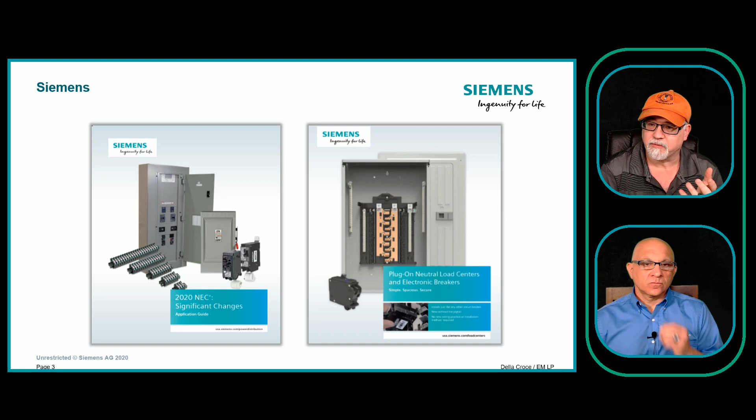Dealing with 680 is one of those articles in the code people don't pay a lot of attention to. They might not do pools, but every now and then. The problem is you get complacent and don't think about the hazards involved with doing things incorrectly in 680. We're so busy immersed in things like 250 grounding and bonding, so immersed in branch circuits, 210, 230 for services, that we kind of lose sight of the structure of the code.

Chapters 1 through 4 of the NEC apply broadly throughout the NEC. Chapters 5, 6, and 7 will modify or supplement chapters 1 through 4, so we have to think about those things. When we get up into 680, we tend to do things a little differently.

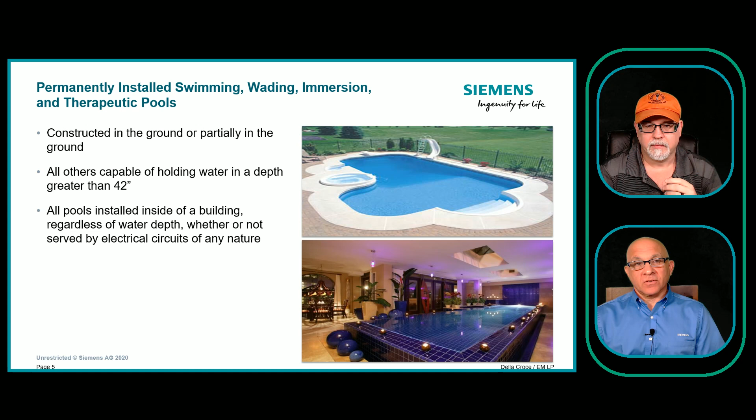So that's important to note. I've seen a tremendous amount of pools inside, other than inside, gyms, fitness centers, that type of occupancy. But the 42-inch measurement here is really critical, the greater-than-42-inch depth, because we're going to compare that to the storable pool definition next, to discern the difference between a permanent and a storable pool. And the 42 inches is going to come up again for storable pools. So that's an important number to keep in the back of your mind, if it can hold water to a depth greater than 42 inches.

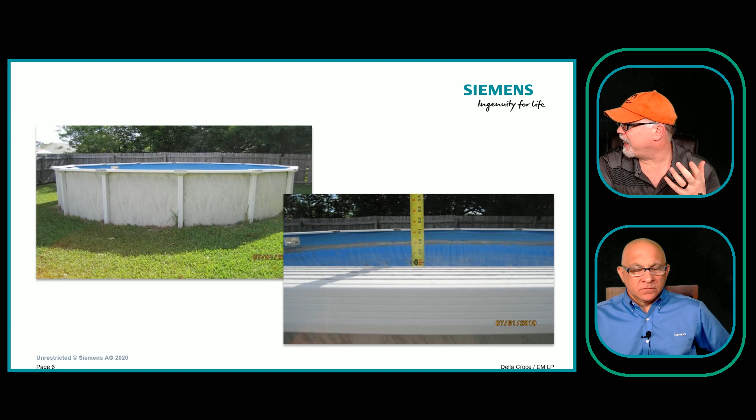But we can have the same pool made of the same material, holding water to a depth of less than 42 inches, and it's going to be a storable pool. It's just the water depth, not so much the construction or material of the pool, for the most part. So the target area for them to remember is that 42 inches is the line of demarcation on whether something's considered permanent, even if they're made exactly the same. It's the depth of water. Of course, and indoors doesn't matter - it's still considered permanent if the pool doesn't matter the depth.

And we say for the most part, because we're going to see a little blurb here when we're looking at storable pools now. So we shift our thought process a little bit to the storable swimming pool or immersion pool, spas or hot tubs - all of the storable type.

Right, so the definition tells us it's intended to be stored when not in use, meaning when it's not in use, this is going to be drained and put away. These can be constructed on or above the ground, capable of holding water to a maximum depth of 42 inches - like we spoke about, maximum 42. Or it could be the pool, spa, or hot tub constructed on or above the ground with non-metallic molded polymeric walls or inflatable fabric walls, regardless of the dimension.

So if they basically - soft spas, I've seen those soft spas, right - that would be an example of a storable. I'd also remind people out there that say, hey, my pool is storable, but I don't intend to store it, it stays up all the time. It's irrelevant what you intend to do with it. It's the concept that it is designed to be storable. Just because you want to leave it up all the time, it still would be storable, again, if it's capable of holding water to a maximum depth of 42 inches. So whether you remove it or not is irrelevant to this.

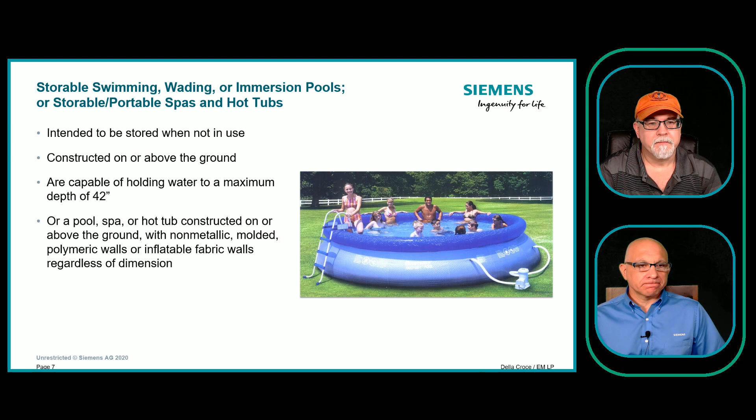All right, so this is kind of like that picture that we saw earlier - hammering home visually that this pool could be storable or permanently installed depending on the depth of the water. Bear that in mind because you might think you're getting something that's storable at 48 inches, and you install it, and an inspector comes out and considers it permanent, and you're thinking no way, this is storable - but the depth is going to say differently. There are significant requirements associated with a permanently installed pool versus that storable, which are not associated with the storable pool. So it's important to determine what it is.

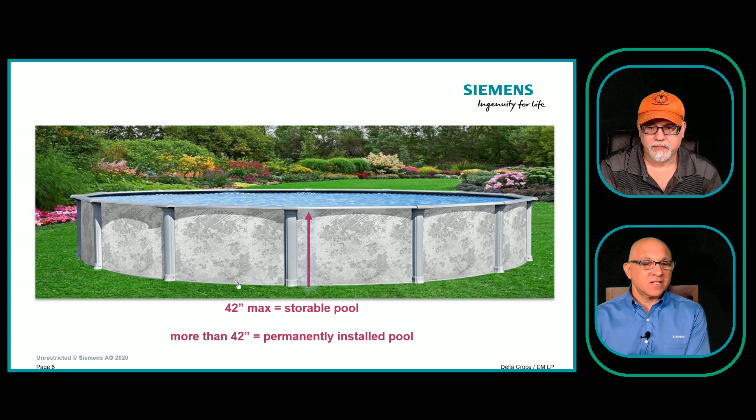So Vince, talk to us a little bit about this. Obviously we have pump motors for permanently installed pools as well as storable pools. The question comes up a lot, and I'll let you explain this, because I believe you also have previous history with listings, doing field evaluation type things. For people out there, pool pump motors that are permanent, can you use the permanent ones on a storable? Can you use a storable on a permanent? I guess that's kind of a lead into what we're talking about with this slide.

So it has a specific listing. Now, we can hope that all pumps say that, that it's listed, but I don't know 1081 - I don't know if that language, 'caution, this is for use only with permanently installed,' is required by the standard or if this manufacturer just added it. I assume the standard requires that marking, but that's a guess on my part. I'm pretty sure it probably would, because there are limitations with pool pump motors for direct wired applications versus what you'd get for these storable pools and things like that.

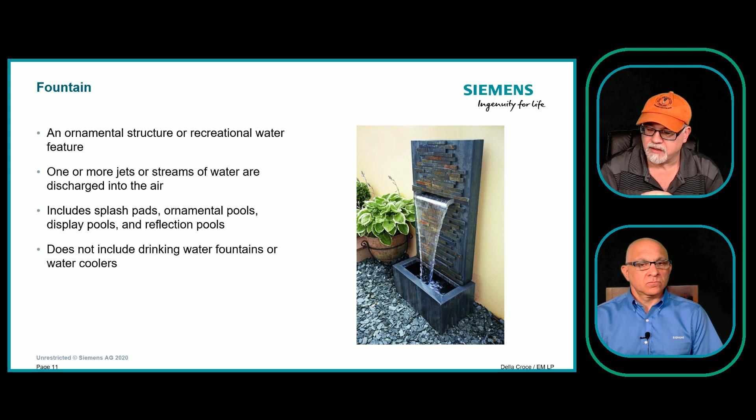So there should be some synergy between the work we do in this article versus what we do in 422. One of the things that changed was to clarify fountains, to differentiate them from drinking water fountains or water coolers, because drinking fountains are a totally different thing. That was clarified in the 2020 code.

Now, permanently installed decorative fountains and reflection pools - so again, we just covered fountains broadly, and now we have different, more specific fountains. Interesting enough, these decorative fountains and reflection pools can be so closely related to a swimming pool aspect that it could actually turn the fountain into having to meet the requirements of a permanently installed pool.

In the image we see here, this is obviously not anything to do with a permanent pool. It's separate - a decorative fountain application with its own definition. So you want to take that off, and we'll continue.

They're constructed in the ground, on the ground, or in a building in such a manner that the fountain cannot be readily disassembled for storage, whether or not it's served by electrical circuits. Certainly not portable - this is storable versus not.

The definition also tells us they're primarily constructed for their aesthetic value. They're not intended for swimming or wading, so nobody's really supposed to be jumping in these things to float around - but we know they do. That's also a factor in whether electricity is served to it or not, since there are still associated hazards involved.

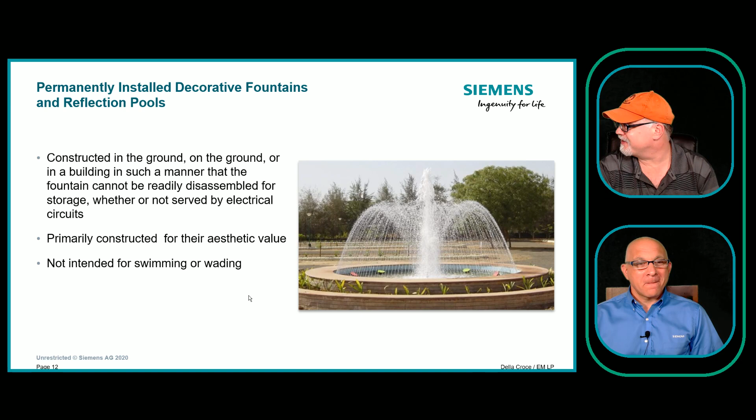Anything else you want to add on that? That's pretty cut and dry. I guess the only other thing to note is that this is a new definition for the 2020 code.

We didn't have this previously. So what did we call it? We probably called it a pool—a permanently installed pool. The depth, if it's in a building, we know it's permanent. If it's in a church, it's permanent. So what else were we going to do?

I think that might have caused problems for some people with how you have to meet some of the requirements for equipotential bonding and things like that. You didn't know. What did we do before? Did we treat it as a storable pool? Was it treated as a hydromassage tub or some type of physical therapy spa? The question is, I don't know. We'd probably get, if we asked 50 different AHJs and 50 different municipalities, 50 different answers.

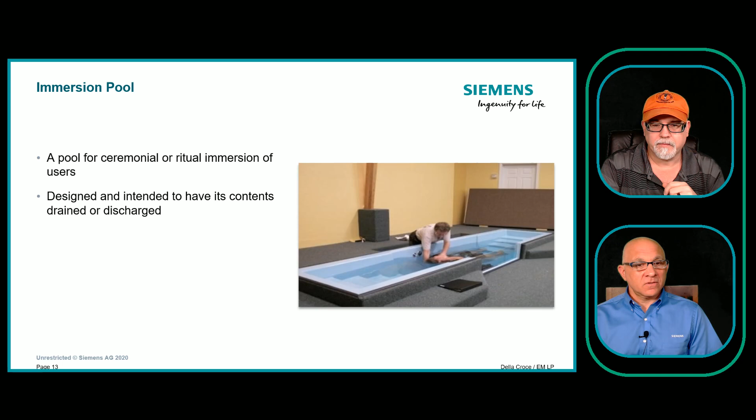I've loved being part of the code development process rather than sitting on the sidelines—being active and involved in it. It takes a serious level of commitment, but it's very rewarding to see the code get better each cycle. I think 2020 was a huge leap forward, and I'm excited 2023 will be as well, with a lot of people getting involved. There were a lot of changes in 2020 in 680 and outside of 680—another active code cycle of the year for change.

So you kick in chemicals, whether it's ozone treatments that you do. This hot tub that I used to have was ozone, and that was its process of sanitation. But you have the chemicals, so you're not going to drain the water.

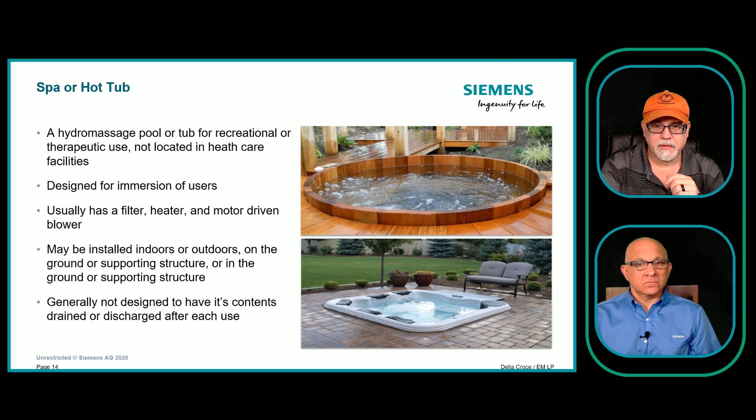And of course, ours had the ozone filtration system built into it and everything. In fact, ours also had a stereo system built in, so that when you're in the water, it actually played music from the water through the bubbles, and you could hear it while laying in it, because otherwise the speakers would be too loud. But it was designed so that with your head on the rest, you could hear the music better. That was kind of neat the way it would do that.

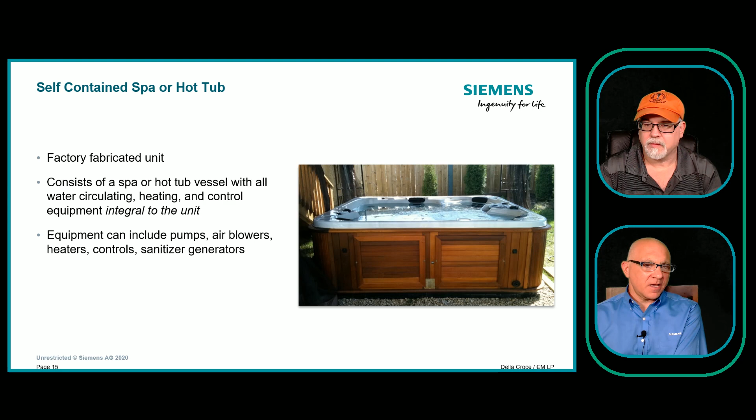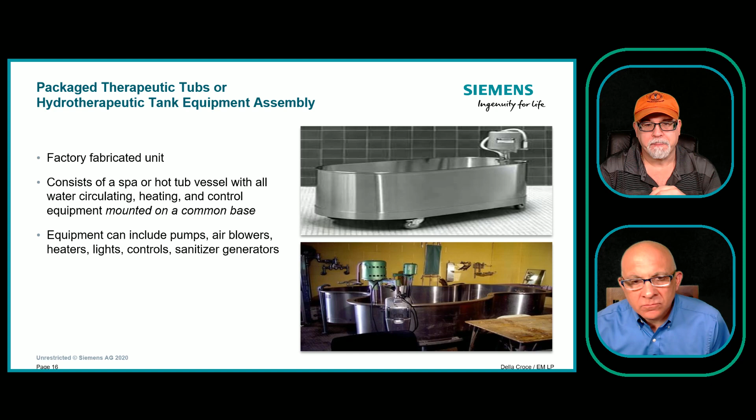Obviously, in this case, pull the drain, refill it. It is a bathtub, and I think I have to explain that to people all the time. It has all these features - it's a bathtub, it's still a bathtub. It's for bathing, you can enjoy it, you can relax in it. It's for therapy, hydromassage, but it's a bathtub, right?

Not to be confused with a hot tub or spa. Yeah, we would drift into a part of 680 that we wouldn't want to be in if we considered this a spa or hot tub. The Hydromassage Bathtub has its own part inside 680, and I get the luxury of staying in there - I don't have to do some of the things I would do if I treated it as something else. And of course, we're going to cover all that in this series, so you're going to learn all of that.

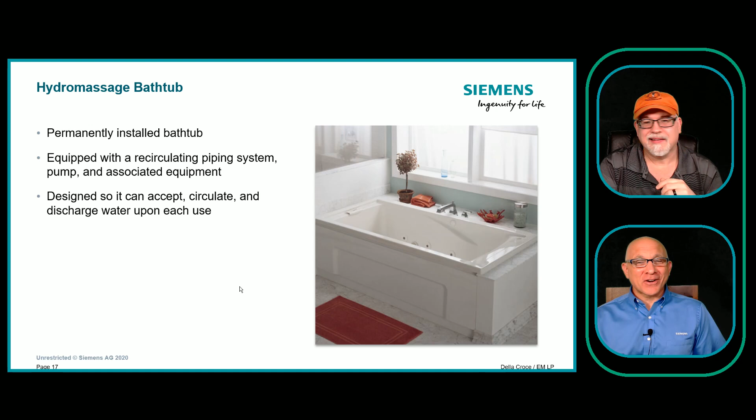They have been around for quite a few years. So I guess that means we're old. That's true, but certainly for the last 15, 20 years we've seen these around here, there, and everywhere. Amusement parks like King's Dominion, Busch Gardens, Disney, they had the water parks, probably had these things well before anybody took them into consideration of what they were. It's water, and sometimes they have lighting components or things near it, and receptacles, so I guess it's things we have to think about.

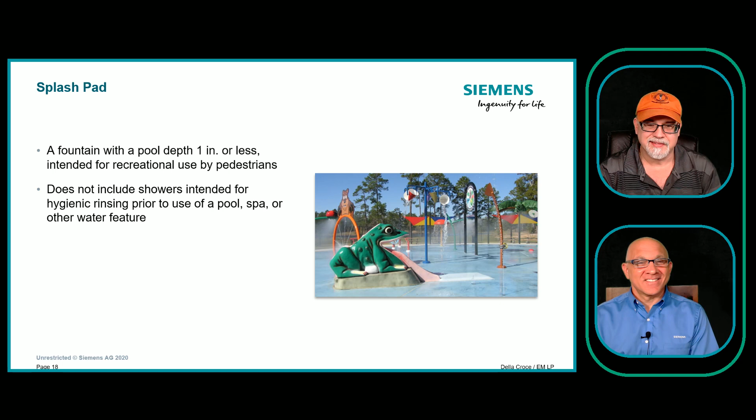We spent a lot of work in the last 2 cycles trying to define what a corrosive environment is, and I'm going to do my best to keep my opinion out of it because we worked very hard at trying to clarify. The problem I originally had is that we don't really define what a corrosive environment is. We give some guidance and we have some assumptions of what's considered a corrosive environment based on data or incidents that people can report, corroded material, metal.

All right, so I'll lead into the definition. This language for the 2020 was in 680.14. Yes, and it's been relocated as a definition now. Yeah, we'll leave the wiring methods separate. Right, so we'll get to those. So for those who are just seeing this definition for the first time, maybe we can say, quote unquote, it's a new definition, but really this language was in 680.14 in the 17 NEC. Now it was plucked out of there and actually brought up as a definition.

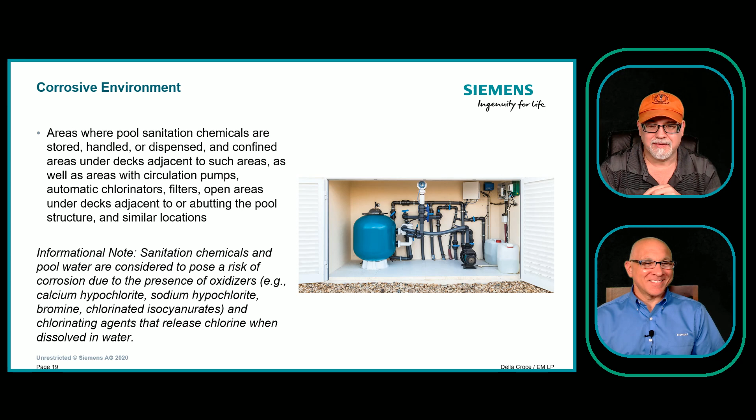Again, before I change off this slide, I just want to remind everybody that all of that stuff in that room is plastic. Just think about that. All right, we'll go on to the next one.

I didn't soapbox too bad. No, that wasn't too bad. All right, not too bad. Okay, next, Vince, take this up.

Again, we're all familiar with lighting around our pools and things like that. We have this concept - before you do this, I have people ask me all the time, is 1,000 volts low voltage? And the answer is yes. Is 120 volts low voltage? Yes. Is 70 volts low voltage? Yes. So over 2,000 is medium voltage, over 35,000 is high voltage. Anything from 0 to 2,000 is considered low voltage. So in order to clarify certain applications around pools to a voltage level, we had to have a definition. This is not new - it was just talked about in other areas in 680 that got moved over into a definition.

What are we talking about? Low voltage contact limit. It's so important that they didn't just say low voltage - it's low voltage contact limit values. We've got different types of landscaping luminaires or pool-related luminaires that are going to have a low voltage contact limit. So what do we have here as options? Right, so yeah, this is not a new definition for the 2020 code. I think this came maybe 3 or 4 cycles ago - it was actually in the code when dealing with luminaires and applications, and now it got moved a couple cycles ago over to here. Obviously it's broadly used.

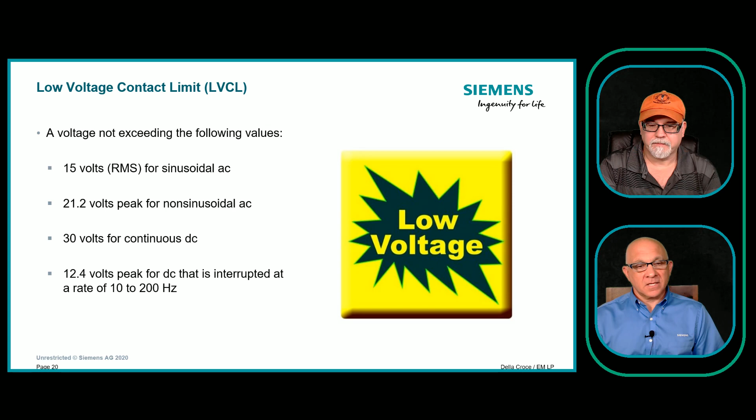Okay, we had a little discussion. We were talking about all the different pools and things, but then again, a lot of the references talk about maximum water levels. What is the maximum water level?

The thing that comes to mind, Vince, is if I have a pool with a skimmer and the water can never get above the skimmer because it constantly will pull the water out and circulate it, where's the maximum water level? Is that the maximum water level? Or if I have an application where I don't have those and the water could get to the top and flow out, well, what if the skimmer's not working? What if that stops, which is doable?

It can be clogged up. If you ever had a pool and you don't do proper pool maintenance, it can fill up, and then again, it's useless and it's going to continue to fill. So we had to have a definition. So kind of talk us through this definition.

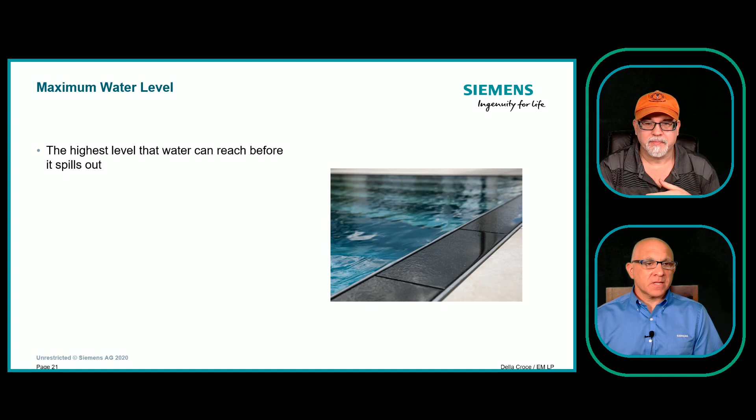All right, so that was our definitions, and I encourage you—again, I think we didn't cover them all. Understanding wet niche luminaires and definitions of a wet niche luminaire, understanding what a dry niche is, all those type of things—I encourage you to read it. Don't skip out on looking at definitions. They're really important. As we move through this series, you might see times we'll go back to the code book and look at something if there's a definition that we didn't discuss, so we can make the user aware of it, or whoever's watching the video.

So we're out of .2. We're going to move into section 3, which is approval of equipment. So Vince, you want to take us through this, since you have a little bit of a background in some of this kind of stuff.

So yeah, I think we probably should have mentioned earlier, we're in part 1. Part 1 applies generally. There's a lot of requirements that we're looking at in part 1 here that are going to apply to whether we're dealing with a spa or a hot tub or a fountain or a storable pool or a permanently installed pool.

A lot of them make reference back, and the scope of each part will tell us if part 1 applies or not. For the most part, off the top of my head, most parts say comply with part 1 and something else. Part 1 is going to be the general one. But not all of them, because part 8 says stay in part 8 - pool lifts. Part 1 generally applies, but part 8 covers pool lifts specifically, so just be aware of that. We're in part 1 right now. I'm not going to lose scope - if I start to stray, drag me back into the circle.

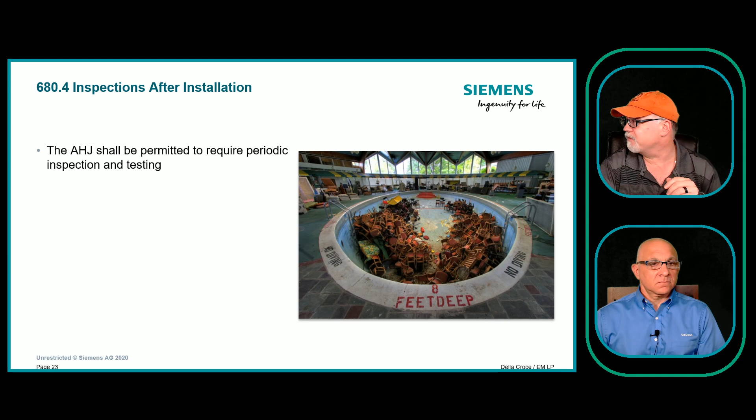680.5, ground fault circuit interrupters, not to be confused with GFI, not GFPE, but ground fault circuit interrupters. Tell me about this one, because I see the ones on the screen, I believe made by Siemens. Well, let's first note ground fault circuit interrupter is a defined term in Article 100. When you look at the definition, and the accompanying informational note, when the term ground fault circuit interrupter is used in the NEC, this is people protection.

This is 5 milliamp people protection. You mentioned GFPE, ground fault protection of equipment, also defined in Article 100. That's exactly what it says it is, protection of equipment, it doesn't care about people. It's set to operate at milliamp levels much higher than GFCI protection. So 4 milliamps or less, not to activate, 6 milliamps or greater, to activate. We choose 5 as a nominal, a benchmark that manufacturers achieve. So again, the definition talks about 4 or less not activating, and 6 or greater activating. This is people protection, to protect personnel.

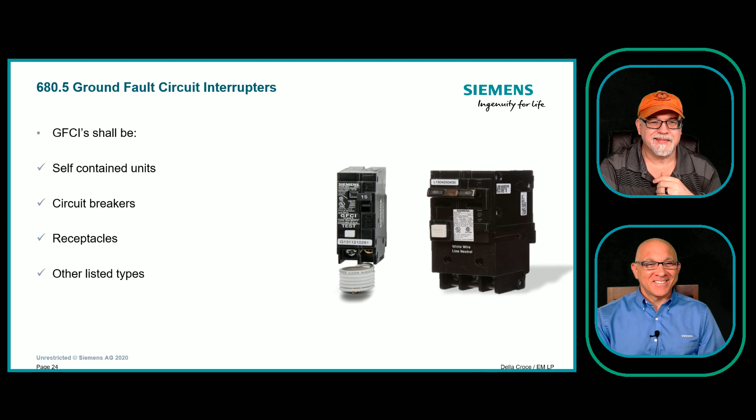Get me excited, talk about 250. All right, 680.7, bonding and equipment grounding terminals. Vince, take this one away. I know that Burndy is a great company that makes a lot of different terminals, terminating devices, and things like that. So what are we talking about here with 680.7?

Yeah, and this is fairly new, I think it really started about the wet and corrosive environments in the '17, I believe, and the worry about the termination, the validity and reliability of the termination in these type of environments, corrosive environment, which is another good example of why we did at least need a definition of corrosive environment, because obviously it's popping up in different locations. So these terminals that we're using for bonding and equipment grounding, they have to be identified for use in wet and corrosive environments. So the code specifically requires that now.

Field installed terminals in damp, wet, or corrosive environments have to be composed of copper, copper alloy, or stainless steel, and all of these have to be listed for direct burial. And they do make products.

My time as an AHJ, sometimes I'd hear, well, they don't make that, I can't get those. That's why I didn't do it, Mr. Inspector, because they don't make one. But the reality was, most of the time, they do make these products. It's just that the local supply house didn't have them on the shelf because nobody really asked for them. Understandable, if installers don't ask for a specific product, there's really no reason for the supply house to keep it on the shelves.

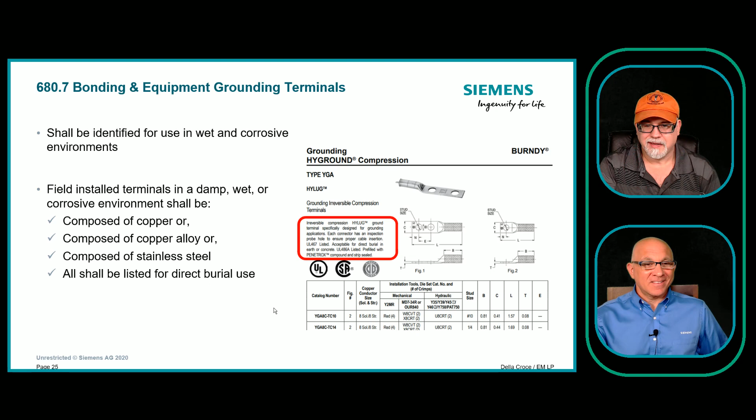Oh well, what are we talking about here? Because it sounds like I was a prognosticator on split bolts. Yeah, you had your tarot cards out, anticipating the future.

A lot of times on the split bolts, I don't know about one that'll accept a couple of number 8s. I don't remember if there's enough real estate to get underneath it. It's not about how many you can jam in the thing. No, okay, well, we know you could jam probably a lot more than what it's listed for.

I was talking about an etched mark on the top of it to signify it actually saying direct burial, because some of these are engraved on there that it is listed for direct burial, a DB mark. But the actual listing, the 467 information in the standard, probably allows the marking to be on the packaging, the container it came in, or maybe the box or the bag.

I think sometimes that's where it'll say it. The most that I've seen usually have DB stamped on it somewhere, so that makes it a little easier. But the one thing I also noticed in this cut sheet, again I assume this is also a Burndy. Is it? I'm not sure who it's from.

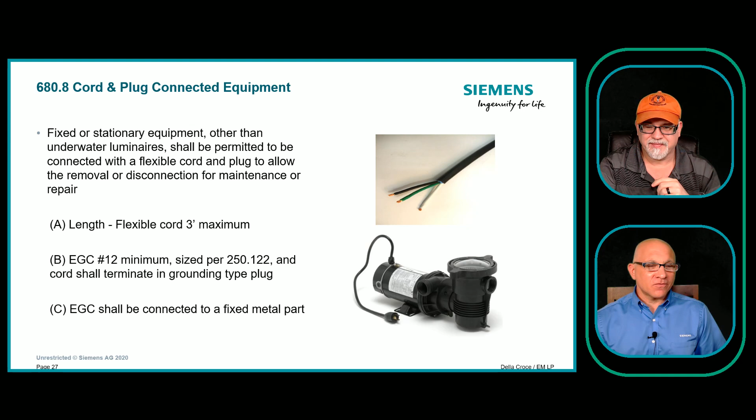Absolutely. I think a lot of installers become, especially now, very nichey. You may have some specialized in healthcare facilities. If you took that electrical contractor or their workers, they may not have wired a swimming pool ever, or once, 30 years ago, and if you bring them out of the healthcare facility and put them in front of pool equipment, they'd be lost. But the same goes the other way - take an installer or contractor who specializes in residential pools, no issue, but put them in a healthcare facility, totally lost, totally out of the comfort zone. So we lose touch with some articles in our career as we move along and focus on others, and that's totally understandable.

680.9, overhead conductor clearances. So what are we talking about here? I know we're going to have images to look at for clearances, but we need a definition of clearances for conductors going overhead, over areas where the swimming pool is and immediately adjacent areas. We're going to look at this, and of course we'll have a figure diagram as well that people might be familiar with in the NEC to correlate all this together. But walk us through this.

We've got some minimum measurements here for clearance above the water level. People may ask why we have to worry about that. Well, a few reasons: diving boards around pools where you elevate yourself a few feet in the air, most likely above the water. Also think of pool maintenance people who come in with those telescoping rods with screens on it - for deeper pools they can extend that rod 10, 15 feet long, and think of them when that pole comes out of the water. They're out of sight, out of mind, not thinking about what's up there. So we've got clearances the code is concerned about, and they're not all the same - we'll have different measurements based on what is above us, what those conductors are doing, what voltages they are. We need to be aware of that and make sure this clearance is maintained for the life of the pool.

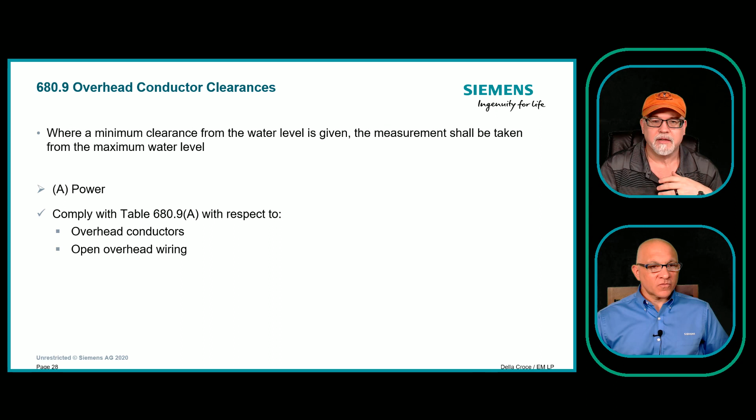Right, so let's go on to this. This kind of describes the figure we're going to look at here in a second, but let's walk around this a little bit because this is in your code. So hopefully folks following along in your code - what Vince has done here is extracted the information given to us in the tables and put it in a tabular format so we can see what we're dealing with, right? Yeah, it's kind of a reproduction of this 680.9(A) table that's in the code book.

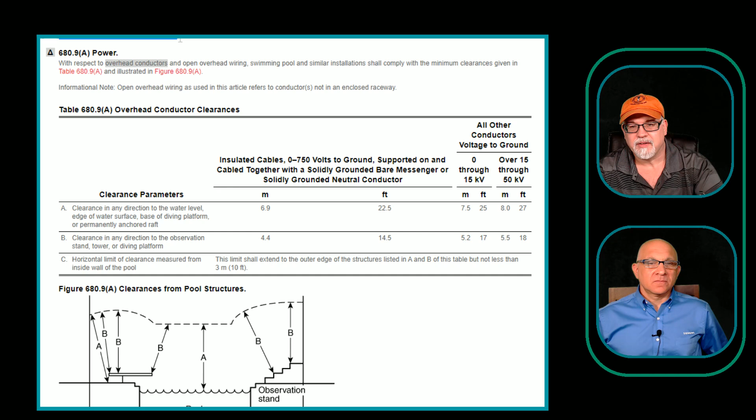So hard, but perfection. The beautiful thing is we can observe the code here, and it says right here where the minimum clearance from the water level is given, the measurement shall be taken from the maximum water level of the specific body of water. So, graphic or not, the code is pretty clear where you take that measurement from.

So I save you, thank you. Save your graphic. All right, so there we've got it. And I think when you're using this figure in the code, it's not brain surgery. You just have to look and see, if you're measuring anything that's going overhead and it meets those columns, then depending on what item it's going over, the observation stand or the diving board or the area that's out 10 feet from it, measured up, because it has to be not less than 10 feet.

So, yeah, but I always think in the back of my mind, these are always intimidating because there's different voltages, so you have to find the right one. Find the right voltage, so following a step, I'm a big step guy, right? So determine your voltage, again it's voltage to ground, not voltage phase to phase.

That's piece one. Then we got to move to piece two now and work through A, B, or C to determine. And if we're in A and B, it's fairly easy. But if we drift into C and get to the 10-foot minimum part, that can be confusing, especially if you haven't navigated 680 in a while, and it could be intimidating for some, and that's understandable, because some of the stuff is tough to maneuver through.

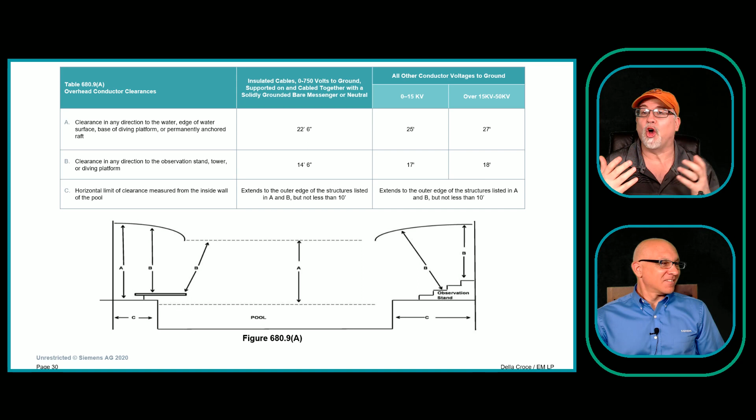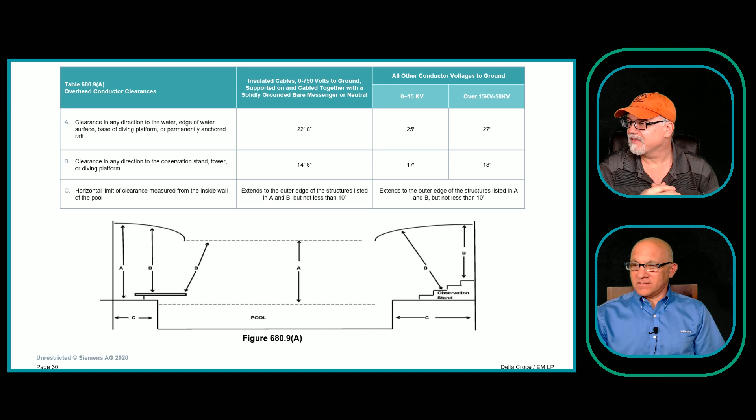Yeah, so it's closet storage space now. In the 2020, it used to be closet storage space, but now it's clothes closet storage space, and it may be the longest sentence in the NEC. The rambling? Yeah, it's one long sentence with a lot of measurements. Again, I think they needed a figure to help that out, and they did put the figure in there, which I think helps. I'd like them to take all the millimeter stuff out of there, but that's my thing. It's ingrained in the code, we always have the millimeter, and the secondary is the actual imperial.

So again, for the 680.9a material here, I think the figure is really helpful to clear up the language a little bit.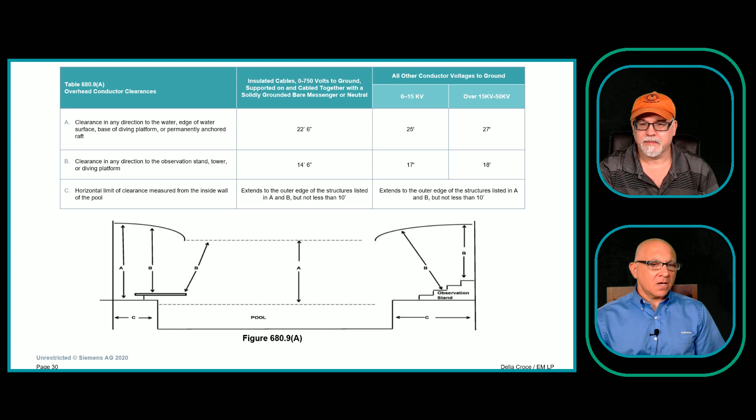So then we move on to 680.9. We're still in it, but now we're going to B, and of course we're encompassing B and C here as well. So talk to us a little bit about this. Here's where we break out of A, which we just looked at, that was power. It's power, yes. Now we get into B, which talks about communication systems, covered in Chapter 800, Articles 800 through 820. Those are for communications, for radio, for coaxial, right? And here it says a minimum of 10 foot above the pool, the diving structure, the observation stands, towers, or platforms. So we leave A, we leave 680.9a.

We leave the figure behind. Yeah, no mention of the figure in B or C. We just, if it's a communication system, an 800, 810, 820 communication system, the code requirement is 10-foot clearance, period. Again, from the maximum water level. 10 foot, so it's a much lower height or clearance requirement, and that's because it's a communication system, so the voltage levels we're talking about here are extremely low, probably under 50 volts for most of these.

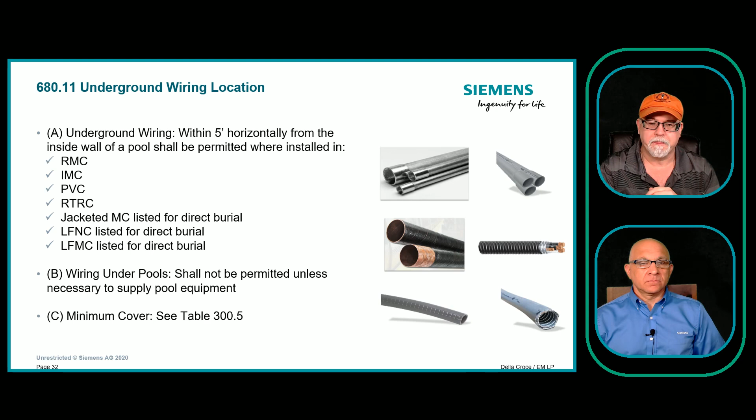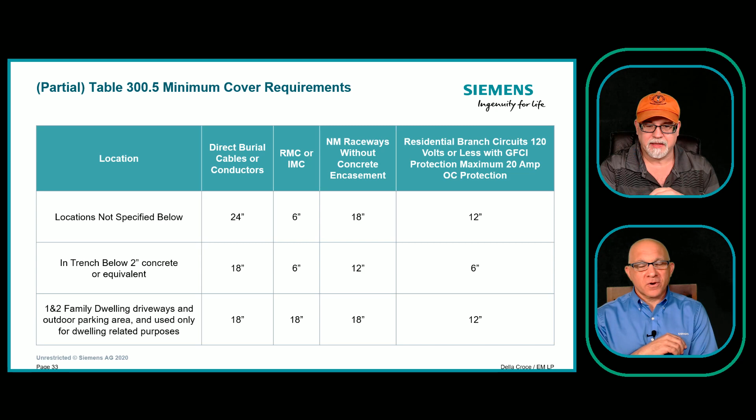Ooh, stay tuned for part 2, I guess, because we'll be covering some of that material. Yes, covered in part 2 for permanently installed pools. Absolutely, we're going to get in depth. In depth about the depth requirements. That's right. Oh, I don't have that queued up.

Sorry about that. All right, so next, 680.13, maintenance disconnecting means. So, talk to us a little bit about this here. So you read it, and then I'll chime in on some actual experience that I have that installers need to be aware of. So this is our maintenance disconnect requirement that we have here.

So we want to have some way as an installer or a maintainer to be able to turn off power to whatever equipment we're dealing with about the pool, whether that's a pump, a heater, or a chlorinator. It could be the pool pump, it could be the spa pump. We want something that we could go there, be able to shut off, put that equipment in an electrically safe work condition.

This is very different than an emergency disconnect, correct? Absolutely. With emergency disconnect, I want people to pause and ask, is this residential or commercial driven? With maintenance disconnect, it doesn't matter, it's everything, residential or commercial. Whereas the emergency disconnect is different, but that's drifting into a different article, right? 230.85. See, he's got to rein me back in, I'm going ahead of myself.

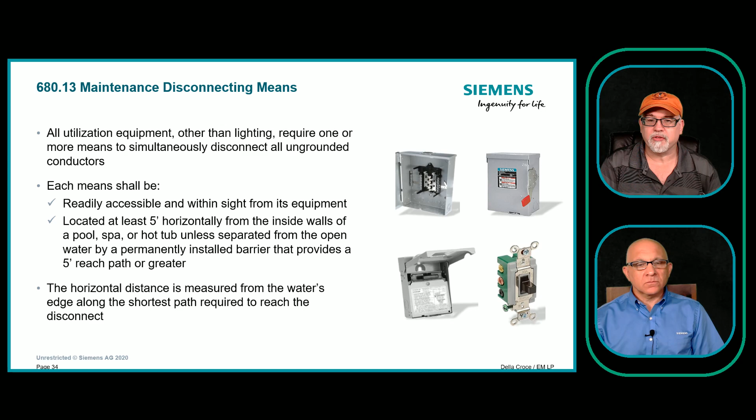Okay, 680.14. This is all you, my friend. No, because we don't want to have a spirited debate.

680.14, wiring methods for corrosive environments. Now assuming we understand what a corrosive environment is—and the definition was clear as mud—without any values when it comes to microns or whatever concentrations would be in the air, whatever the saturation or that type of thing would be.

So we're talking about the wiring methods that are going to be utilized in areas that would constitute a corrosive environment. A lot of work was done on this during the Code Panel 17 period last cycle for the 2020, in order to craft the language.

They have a history of being utilized and adequate for a corrosive environment. However, we've seen plenty of rigid metal and intermediate metal rust out. We've seen PVC get brittle, depending on the chemical concentrations of where it's located, as I was talking about earlier.

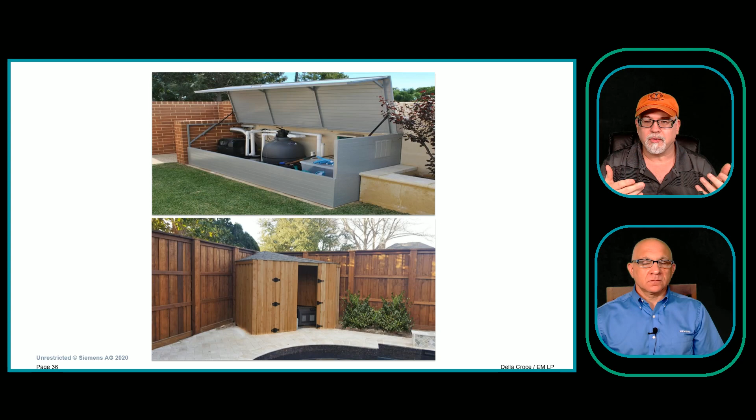This didn't happen a week after installation, it happened months and years afterward, as fumes in the air associated with the pool and pool equipment did deteriorate other equipment in the area. So it happens, we know it happens. There's a reason people buy rigid and get a PVC coating on it. That's why I explain to people to use a little common sense, because there are different products, like Robroy, that people buy that are PVC coated for use in a corrosive environment.

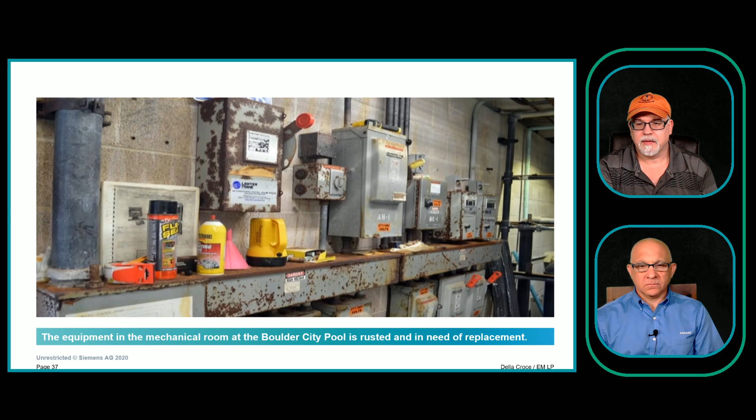All right, well, leave it for me to mess my slide up right at the end, man. I was doing so well up to this point.

But again, that was a lot of information, a lot of general information that's going to apply to most of these other parts, as long as the other part in the scope tells us to go to part 1, because part 7 and 8 are not really going to push us to part 1, they're going to leave us in either 7 or 8. So again, the importance of the definitions, knowing what we're dealing with in the field, reading the scopes, making sure we land in the right part of 680.

Absolutely, all right. So you made it through part 1. You're going to need that information as we move on into the other parts. Most certainly we're going to need that in part 2, part 3, part 4, and part 5 to some points, and again part 6. So it's good that you have all that base information as we carry on into the next part. Stick with us, thank you Vince for working with us here on part 1, and we will see all of you in part 2 of this series.